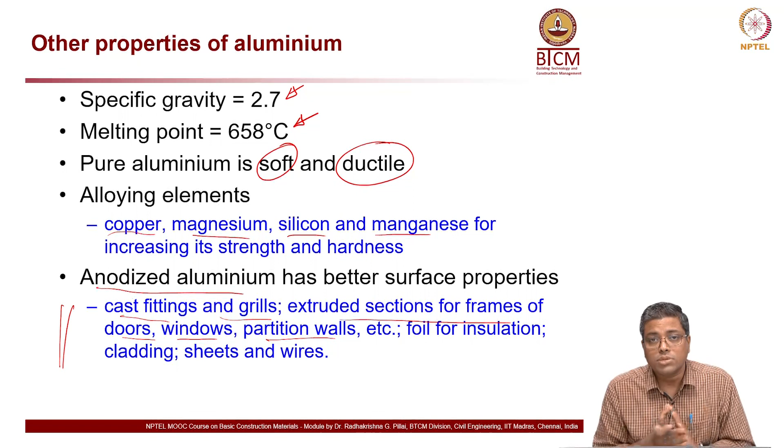which is used for cast fittings, grills, extruded sections for frames, doors, windows, and partition walls. You can notice all these are really non-structural elements; they are not part of the major beams and columns in a building. So I'll just show you how this anodizing is being done.

What is this? This is a process of coating the aluminum with a thick layer of aluminum oxide. How is it done? By dipping the aluminum in a diluted or weak sulphuric acid bath.

What you see here is the sulphuric acid bath, the H2SO4 bath. Then you have this aluminum, and this is a cathode here, and aluminum is the anode.

A low direct current, or low DC current, releases the hydrogen at the cathode, and the hydrogen comes out, while it releases the oxygen at the surface of the aluminum anode, which is the positive electrode.

So what happens eventually is the aluminum oxide is formed at the aluminum surface, creating a build-up of a transparent, porous, abrasion resistant, corrosion resistant and non-conductive aluminum oxide. So there are so many properties for this aluminum oxide, or what we call anodized aluminum.

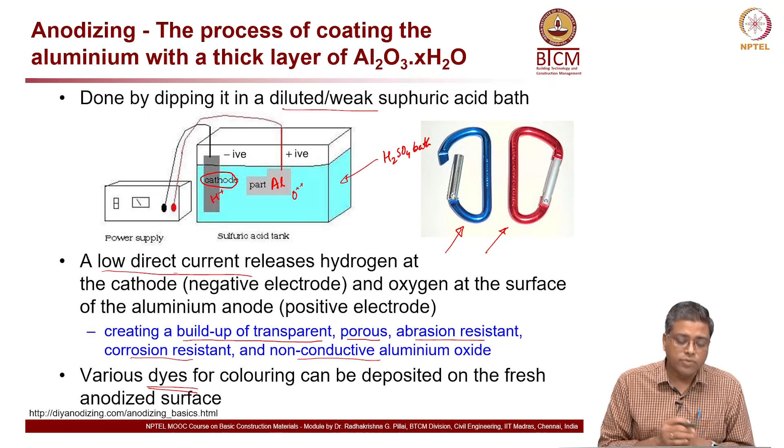To provide color, like you see on the right side with the blue and red keychain, that is achieved by using some dyes. Coloring dyes or pigments can be deposited on the fresh anodized surface. I will show you how it is done.

You can see here this yellow shaped element, it is yellow in color because they used a dye which has yellow color. You can see here a sulphuric acid bath into which this is dipped, and then after that it is cleaned and goes through all those processes.

This is essentially the cleaning process going on.

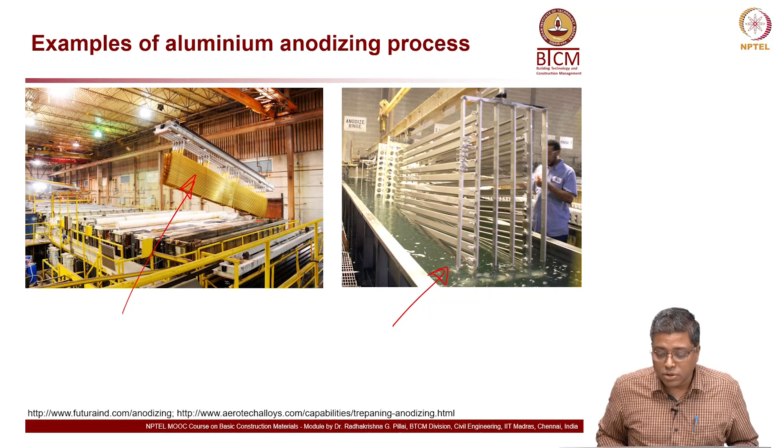Now, how is the anodized aluminum made or enhanced so that there is good resistance in terms of hardness, and also so there are some kind of pockets for the dyes to occupy the space, giving it color?

So what we do is, first the process is you take a silicon carbide mold. The reason is it has these protrusions on it. Now when this is pressed against the aluminum plate, there will be indentations formed on it, so you are essentially making a uniform structure with indentations.

Then you grow the aluminum oxide on that surface. This is the aluminum oxide which is grown by applying current to it. This is that oxide layer, the white thing. So you have this oxide layer formed.

Then you have how the mixing process, or the movement of the dipping elements or the anodes in the solution, or the flow of the solution around this, and the temperature of the solution, play a key role in forming this oxide layer.

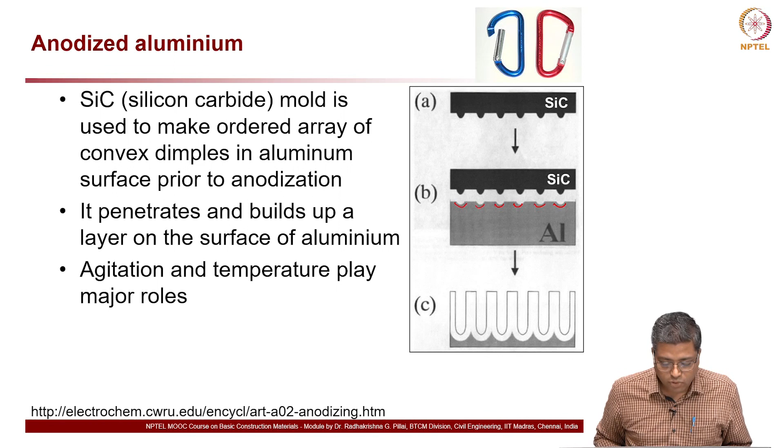So eventually what you get, you can look at this, this is the oxide layer or the U-shaped layer which is formed. It is at a microscopic scale, and then inside that you have metal deposits, which is basically giving you the color also.

In a rather 3D scale view, it will look something like this. So you have this U-shaped pocket, a honeycomb structure, very similar to a honeycomb cell structure with a hollow core called a pore, and in that pore you fill the coloring pigments, etc.

Now the relationship between the cell wall size and the properties: the cell wall size and the pore size can be controlled mainly by changing the temperature and mixing of the solution, or agitation. Large cells with small pores are stronger and protect the surface better, but do not take the dye as well.

In other words, let us say I am going with a cell like this, and let us say I have a pore like this.

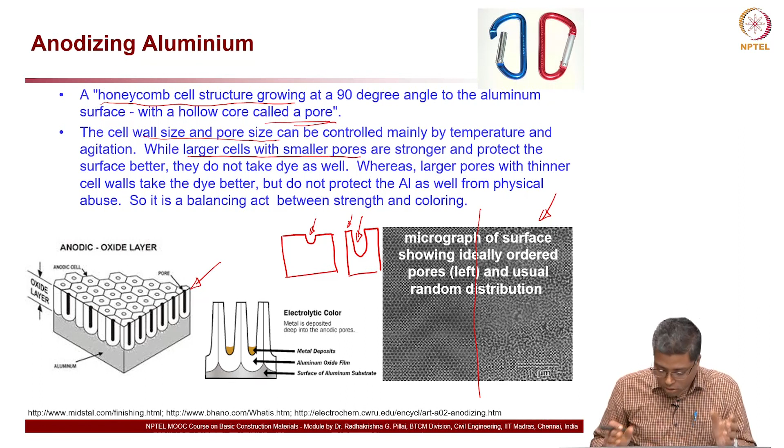Now, on the bottom right, what you see is a micrograph of an anodized surface, showing ideally ordered pores on the left half. You can see here on the left half of the drawing you have an ordered structure, whereas on the right half you have a random distribution. So these are all manufacturing procedures, the anodizing procedures.

Now, what is the advantage of doing this anodizing? You can see that anodized aluminum is the one with the red curve here, and another typical aluminum is the 1100. So the range, the properties, how it can change, and mild steel is somewhere here and hardened steel here. So the hardness, this property is essentially looking at wear cycles, basically looking at abrasion resistance, how resistant the material is against abrasion.

So as a function of wear cycle, what is the thickness? If you look at the horizontal axis, let us take this point, say 0.005. At a thickness of 0.005, that much material, it takes how many wear cycles for that to be lost.

So in case of aluminum, almost nothing, this is where aluminum is, right here. In case of mild steel, maybe it is here. In case of hardened mild steel, you can see it is somewhere here, and in case of hard anodized aluminum, it is somewhere here. So that is the huge difference you can see, about 60 extra cycles were required to remove the thickness loss we are looking at.

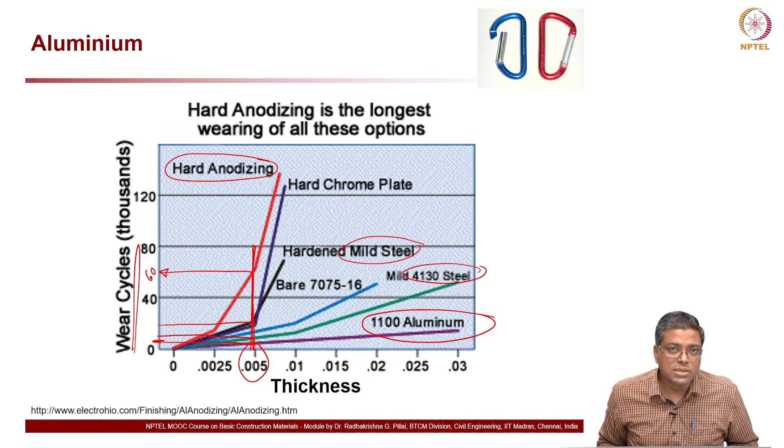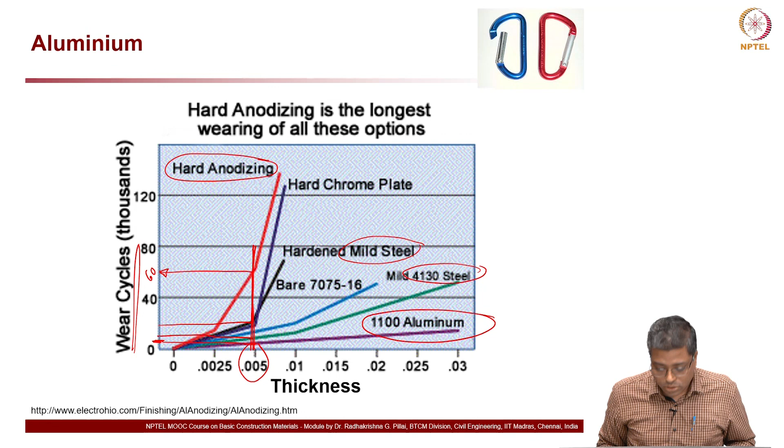So definitely when you use anodized aluminum, you have excellent surface properties. The aluminum with anodization will have very good wear resistance, or rather abrasion resistance. It can be related to that also, if not directly, and that means hardness is also very good.

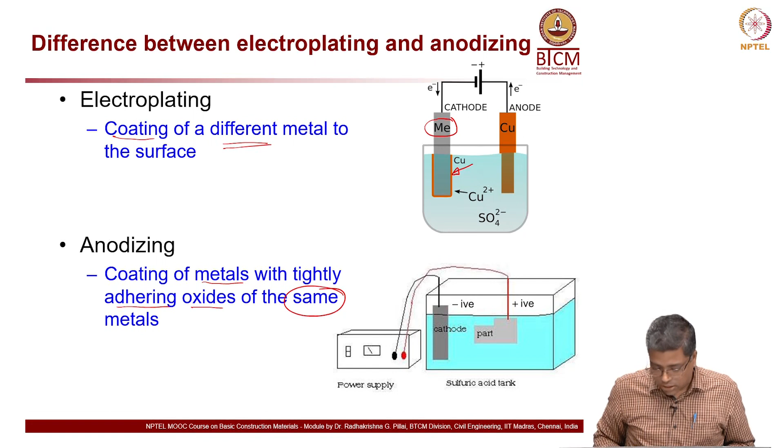In case of anodizing, what it means is coating of the same oxide - coating the metal with a tightly adhering oxide of the same metal, that is the difference. In electroplating, one metal is coated onto another metal. In anodizing, a metal oxide is coated onto that same metal. This is the main difference, and when you do this metal oxide coating, you change the corrosion properties because the electrical resistivity etc. changes, and it depends on the property of the oxide layer, but essentially you get a hard and corrosion resistant surface.

Now, where do we use aluminum? Aluminum foil can be used to insulate buildings - even though not much used in our country, if you go abroad you will see this is widely used in many building constructions. Mainly because it has reflection, it reflects heat from the radiant energy, and up to 97% of the radiant energy can be reflected back if you use aluminum foil.

What does it compose of? You can see in this picture, two outer layers of aluminum foil and an inner layer of some inert material. So it is like a sandwich material, a sandwich product, and typically this inner layer is made of some kind of plastic, polyethylene plastic, fiberglass, etc.

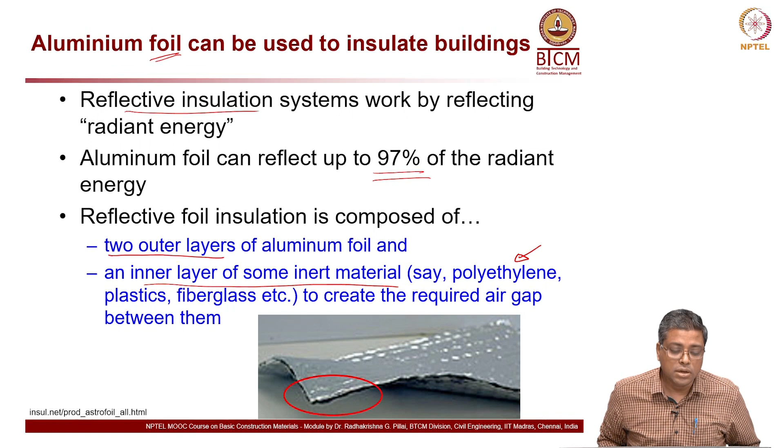The main purpose is to create an insulating air layer in between. So you have an aluminum layer, some air layer with some bubbles, etc. The purpose of this fiberglass or polythene is to create that space in between the two aluminum layers, which provides a lot of resistance against heat across that layer.

Now here is an example to show. You can see on the left side, there is a box like structure here, and here also you can see a box. The fiberglass is ineffective at stopping radiant heat, but the reflective foil redirects the intense rays from the heat lamp, keeping the chamber cool at 78 degrees Celsius.

On the left side you can see it has aluminum foil, with a bulb on top outside, and they are measuring the temperature inside the box. Even though there is high heat from the bulb, it is not able to penetrate into the box, whereas on the right side you can see 107 degrees Celsius. So very clearly, aluminum foil can prevent the entry of heat.

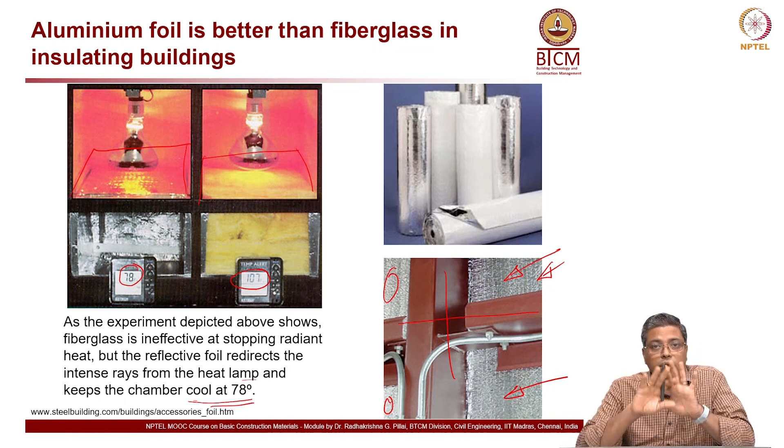On the right side you can see a picture, on the bottom right, which is part of a structural building where you can see a column and beam structure and the wall element. The wall element is actually provided with an aluminum foil so that heat does not enter into the building through that wall element.

Aluminum is also used for formwork because it is lightweight and easy for workers to carry. So it's widely used for concrete construction also. Aluminum formworks are nowadays used for getting nicely finished exposed concrete surfaces.

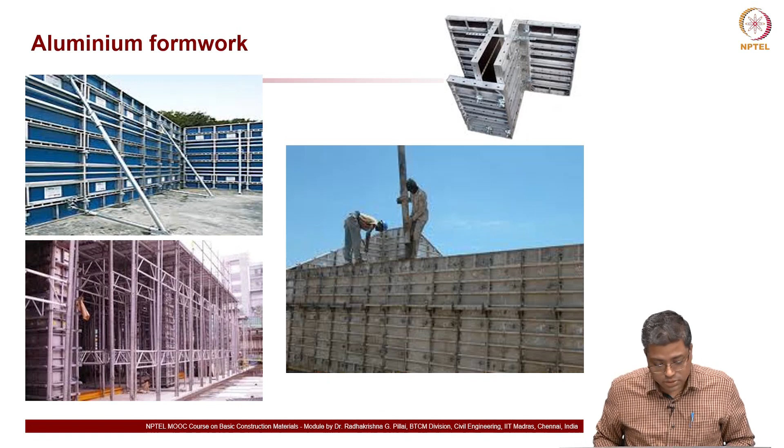Now let us look at the next metal, copper. Looking at copper production worldwide, India is not a major producer. The top producer is Chile, then China, then Peru. Chile is about 32%, China about 9%, Peru 8% - not a big difference between China and Peru, but Chile really outperforms everyone else, probably because of raw material availability in that country.

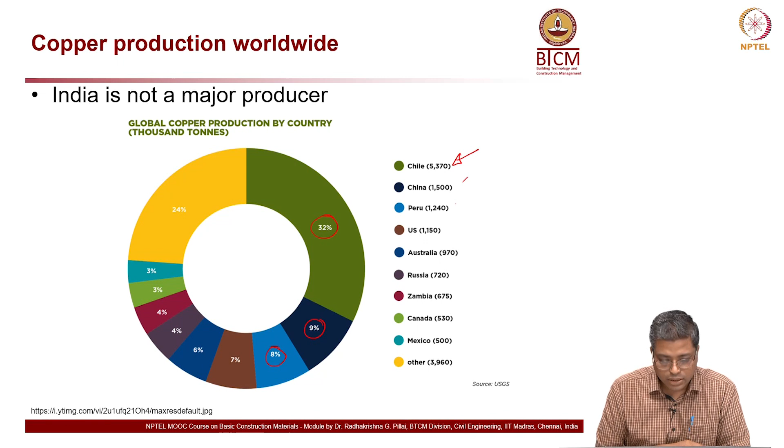For making copper, mainly oxide and sulfide ores are the main ores used for production, and these ores typically contain about 0.5 to 2% copper - just very little. So you have a lot of material to be processed and a lot of waste generated. The typical ores are chalcocite, chalcopyrite, and covellite. About 80% of global copper production is from the sulfide source, which is the main copper ore used.

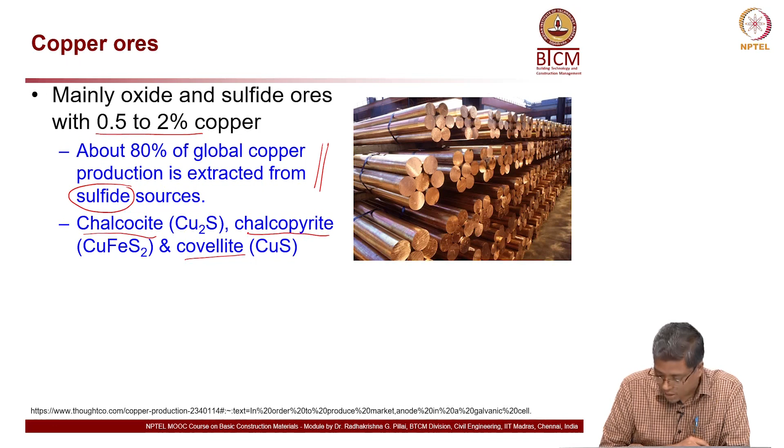The picture I showed on the right side is typical - like in the case of steel or iron production you have billets, similarly in the case of copper they typically produce large diameter rods, which is used for further production of wires, etc. That is probably why that shape is still maintained as circular - I do not know, but I am guessing it that way.

Copper and its alloys, because of high resistance against atmospheric corrosion, are used in buildings along coastal regions and wherever corrosivity is high. Traditionally used in temples, roof elements of temples, and also in ships, sheathing for the hull, which protects the hull from getting into direct contact with the seawater, etc.

On the left side you can see a temple roof in Kerala, because in Kerala you have many temples like this which have copper cladded roofs. And then this is another close up of this, how it will look like. So mainly wherever you have a highly corrosive environment, copper is a good metal to use.

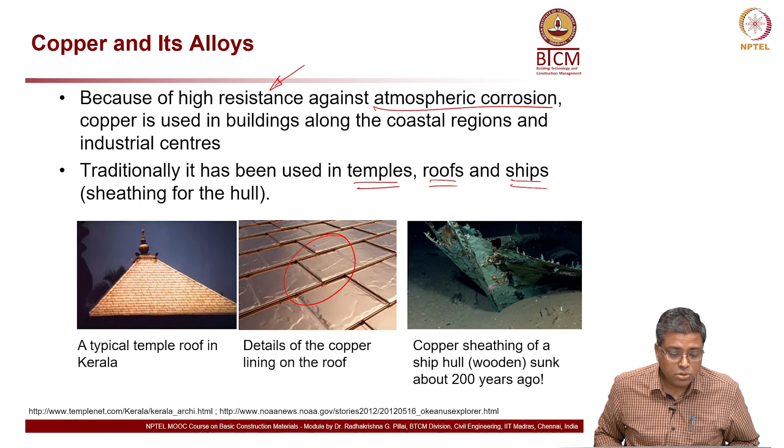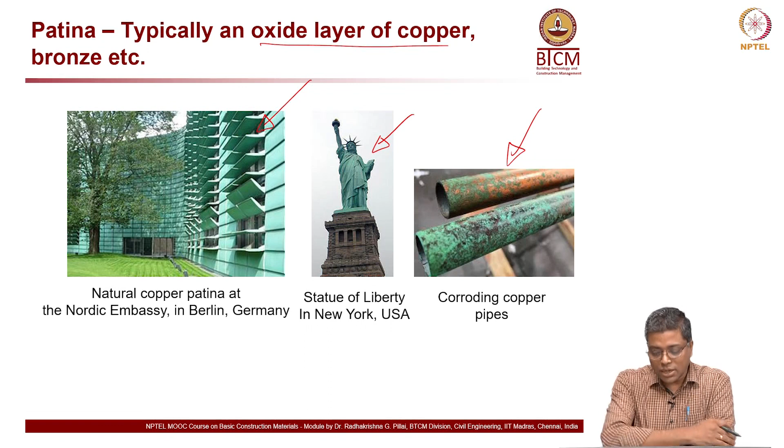The Statue of Liberty's color is not paint, it is the oxide of copper left to naturally form. This is a natural color, it will not fade away. You have to see the beauty of that, but in pipes, when they start corroding, you might see this green color rust on top of copper pipes.

Now, what are the alloys? There are two major alloys: brass and bronze. Copper is used in electrical cables, plumbing, and you can see photographs showing different applications of copper. Brass is an alloy of copper and zinc (Zn), and bronze is the alloy of copper and tin (Sn).

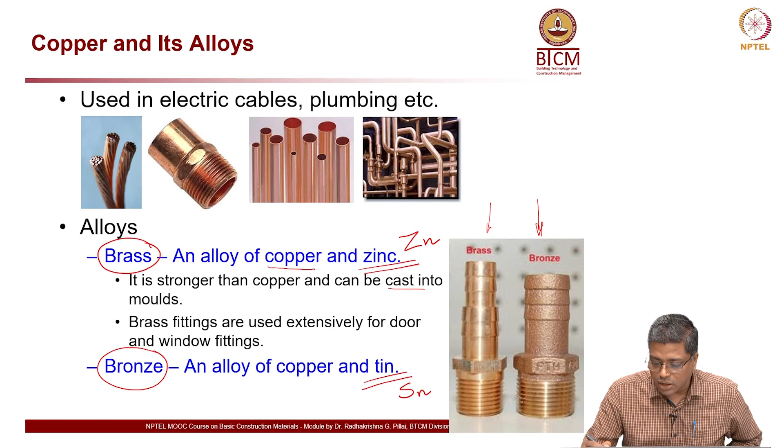These alloys are generally stronger than copper, which is why they go through this alloying process, and they can be cast into different molds or shapes. Brass fittings are used extensively for doors or window fittings. It also has a golden color, so people like it for aesthetic purposes, matching nicely with teak wood, and it's also really shiny. You can see the difference between brass and bronze, though it's sometimes difficult to notice, but here is a sample to look at.

Now let's look at the advantages and disadvantages of copper pipe or plumbing, starting with advantages. It is a relatively soft metal, so it is easy to bend and cut. In plumbing work, if a material is too rigid to bend or adjust slightly, workers may not like working with it. Compared to cement or concrete, copper is easier to bend and cut to a particular size and shape, so workers prefer this kind of pipe rather than steel pipe, which is difficult to cut and work with.

Bacterial growth is less than in plastic pipes. If you have PVC or other plastic pipes, after some time you will see a slimy layer forming inside, which is less common in copper pipes. Copper is also very resistant to corrosion, meaning good durability, and it is UV resistant, whereas PVC or other plastic pipes might not be, and after some time those plastics will become brittle. With copper, you do not have to worry about such problems.

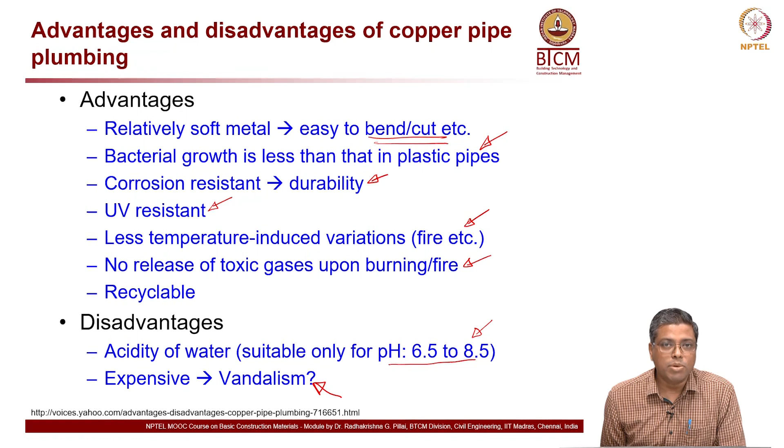Now, one disadvantage of copper pipe is associated with pH. In most of our cities, sometimes the pH value of the water is less than 6.5. In that condition, copper pipe may not be a good option. You have to check the type of solution or water going through the pipe, and ensure the pH environment it is exposed to stays within a good range, otherwise it will be harmful. Another major problem is that because copper is expensive, people tend to steal it, and vandalism is a big issue, though that is a non-technical problem we have to work around.

To summarize today's lecture, we talked about the production, properties, and uses of aluminum, and also the production, properties, and uses of copper, especially in the civil engineering or construction sector. Thank you.